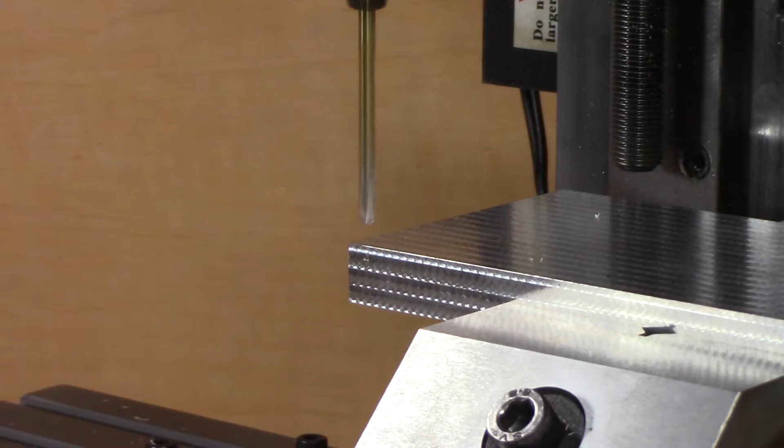This is just fabulous. The first operation is drilling pilot holes for the dowel pins. This allows room for a 1/8 inch cutter to come in with adaptive milling to open up the dowel pin holes so that they're just slightly smaller than needed for the dowel pins. And later I'll come in with a reamer to drill it to the final size.

This is supposed to mill out the holes for the dowel pins, but as you're about to see, I had the machine in the wrong position. I didn't know how far the mill had gone, so that means I didn't know whether I damaged the mold or not. But it doesn't hurt to finish the mold, because it's always possible to repair a mold.

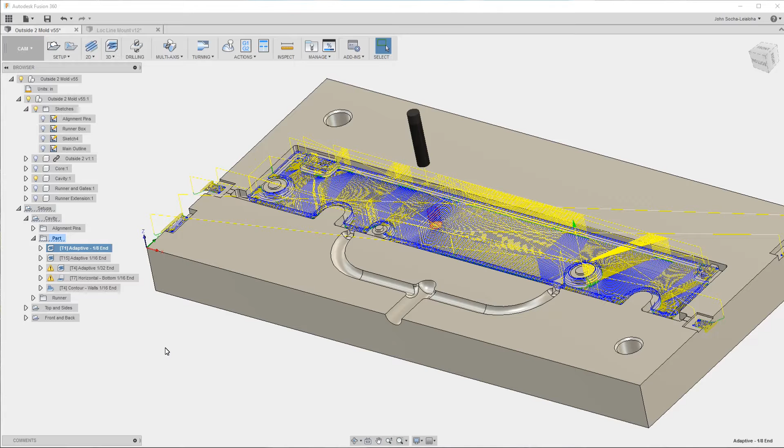In this video, I'm going to focus on cutting out this part of the mold, as well as some of these tabs. I'm doing that with 5 steps. The first 3 steps are all adaptive clearing, and I'm dropping down in terms of tool size. So I start with a 1/8 inch end mill, go down to 1/16, and then 1/32.

And doing that allows me to remove material in additional passes that didn't get removed by the first pass. So for example, here you can see that it's not able to mill into this area with a 1/8 inch end mill, but it is able to get into that area with a 1/16 inch end mill.

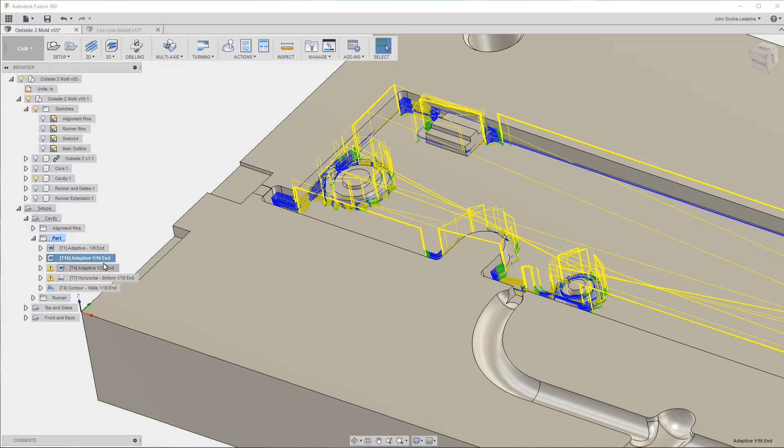The other thing that I'm doing with these three passes is after the first one I'm using rest machining. So it's only machining the areas where there's still material that has to be removed and can be removed by the smaller cutter. The final two steps are I'm clearing up the bottom and then clearing up the walls. Now the walls are interesting.

I can't do that in a single pass because of the draft angle that I have on here. If you'll recall from the first episode where I designed the mold, I have a 5-degree draft on those angles to make it easier to get the parts out of the mold. And that means you can't do 2D milling, you have to do 3D milling to get that angle.

Additionally, I'm using flat end cutters. I don't have any rounded end cutters, just ball nose. But flat is what I need to use for the walls. I have ordered some Lakeshore carbide cutters that have a slight radius on the end, so it's not completely flat. And I think those will do a better job. We'll find out in a future video.

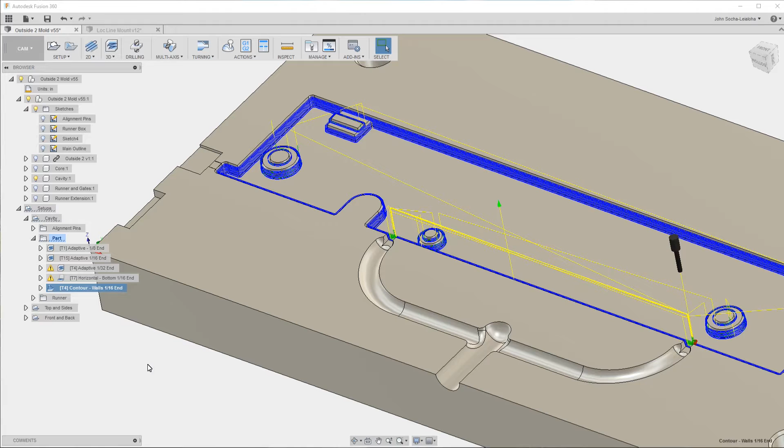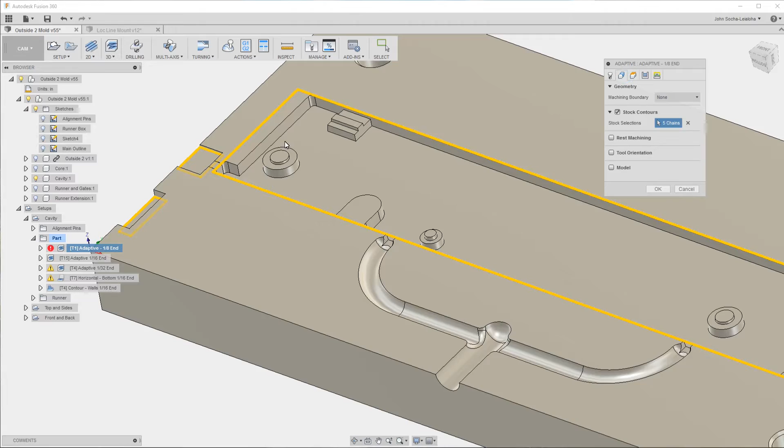Going back to the 1/8 inch, which I'm going to show next, pretty much everything that I set up is the way I've done it in the past. So I set it to the feeds and speeds that I showed in the previous video. And then in terms of what I chose, I used a rectangle around the large cavity and then just clicked on these planes here to select those.

And then the final thing that is relevant is I left 5/1000 both on the sides and the bottom. And that 5/1000 of an inch will be cleaned up by these last two passes here. Let's head to the mill and take a look.

You can see that it's spending a lot of time cutting air. This is pretty easy to fix. You just have to lower the clearance plane. Here it doesn't really matter because there aren't that many entry points, but for the next cutting operation it does matter, and you'll see I'll change that.

My compressor just kicked in and it's actually shaking the floor a little bit because I have it pretty close to the tripod. I'm using the compressor for a little blast of air to clear the chips out of the pocket, and it does a really great job.

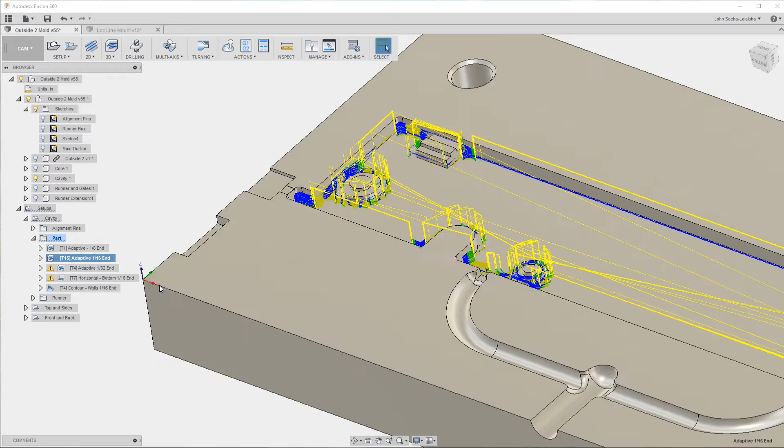Now let's take a look at the 1/16 inch cutting to remove material where we couldn't get it out with the 1/8 inch cutter. The trick here is something that wasn't obvious to me. I had to ask a question on the Autodesk forum, and I got an answer, which was a great answer. So let me explain what I was doing, which is probably what some of you are used to doing. When selecting the geometry, I was used to using stock contours.

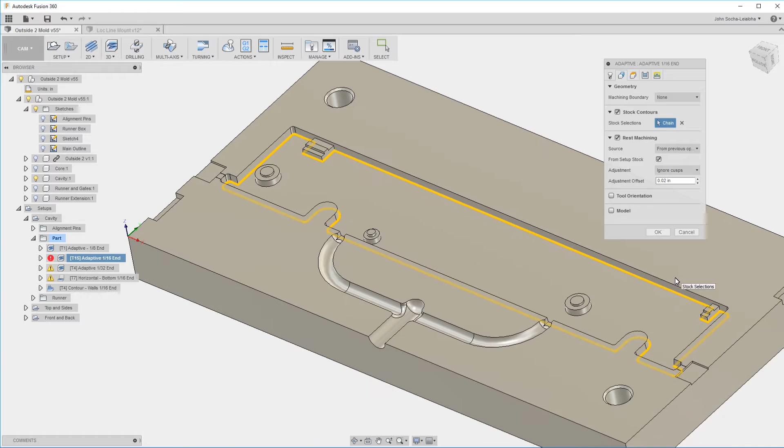So you're probably used to clicking on stock contours and then selecting something like that, which controls the area that will be used for machining. The problem is when you're using rest machining like this, rest machining is creating a 3D model of the material that has been removed so far. So basically the milled operation, the material after the previous milling operation, and then it's using that to calculate the

tool path. That means that when you select rest machining and stock contours, it's going to ignore the stock contours and create a tool path that covers the entire area. That's not what I wanted. So the trick is, instead of using the stock contours, you want to use geometry.

Here what I did is I changed the machining boundary to selection, as you can see there. I selected the same rectangle that I used before, and that told it to keep all of the operations within that rectangle. So now it's able to calculate which parts of the stock can be removed with a smaller cutter only within that rectangle, and that's exactly what I wanted.

If we go back and look at other settings, I left it with a higher RPM, which is what it came up with from the tool library. Most of the other settings I used similar values, so for example feed per tooth. And then for things such as optimal load, I continued to use the same expression, which is to use 10% of the tool diameter. So I pretty much didn't change much, and that gave me this operation here, which is perfect. Let's head to the machine and see how that worked.

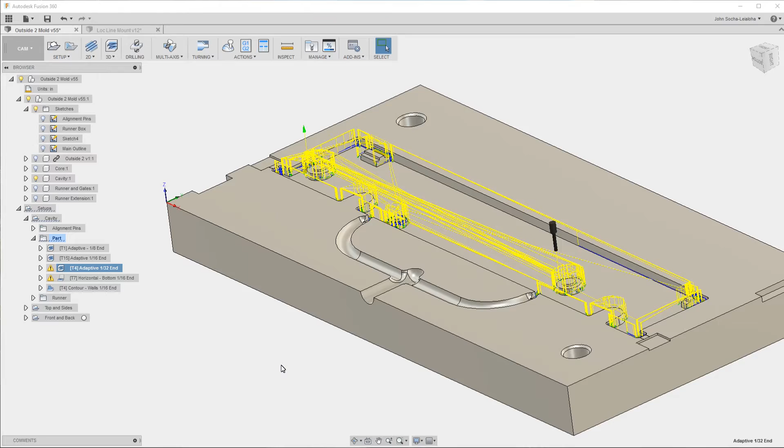Okay, I think you get the idea. Next up is the 1/32 inch cutter to get rid of even more material, because there are still some places that the 1/16 inch cutter could not get to. So I follow the same strategy, which is to use the machining boundary instead of the stock contours. Pretty much everything else the same, and head it off to the machine and you can see what happens next.

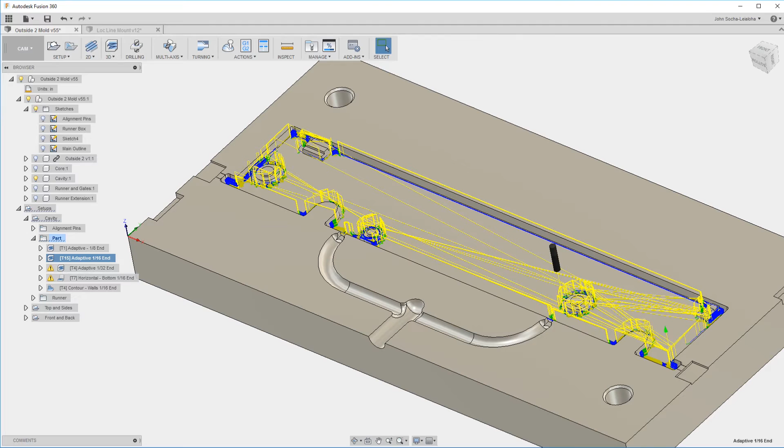So what went wrong? Let's take a look. As I mentioned before, I used pretty much the same settings that I was using with the 1/16 inch cutter, but the 1/32 inch cutter is a lot weaker. And I was too aggressive on the step down. If you take a look here, I had the step down set to tool diameter divided by 2, which means for a 1/32 inch cutter, that comes out to about 16 thousandths of an inch. That was way too aggressive.

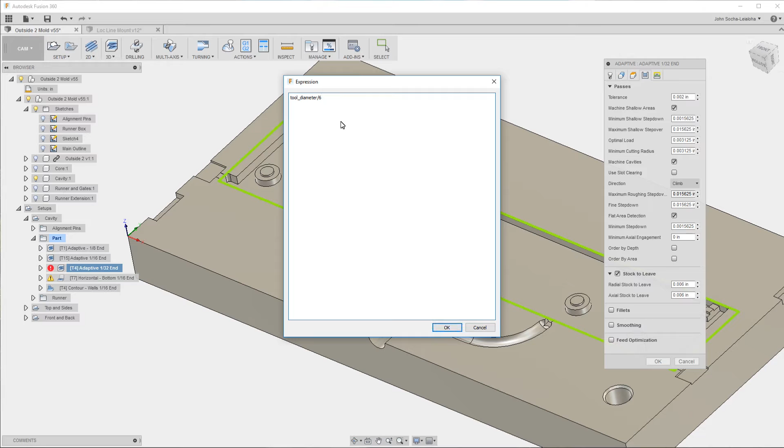So what I did for finishing off this pass with the 1/32 cutter is I changed it to tool diameter divided by 6, which I think is about 5 thousandths of an inch. This takes a while to calculate, but the end result is that it was a lot less aggressive. Unfortunately, it meant that it wasn't using much of the length of the cutter. I had been trying to use more of the length of the cutter, as suggested by John Saunders, for the adaptive milling, but that obviously didn't work in this case. Anyway, changing it to the diameter divided by 6 worked perfectly, and I was able to finish the cut.

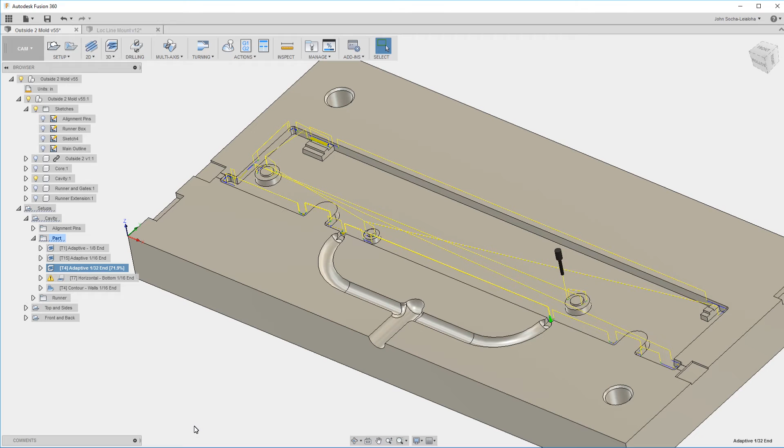Now let's take a look at the finishing of the bottom. Here what I did is I used horizontal roughing, or horizontal finishing. I'm sorry, so it's this one right here, or just horizontal. And there's not too much I changed. I selected the same rectangle I've been using before.

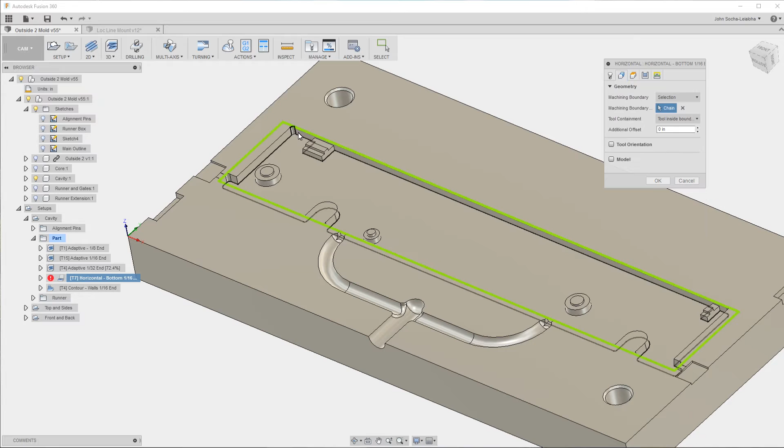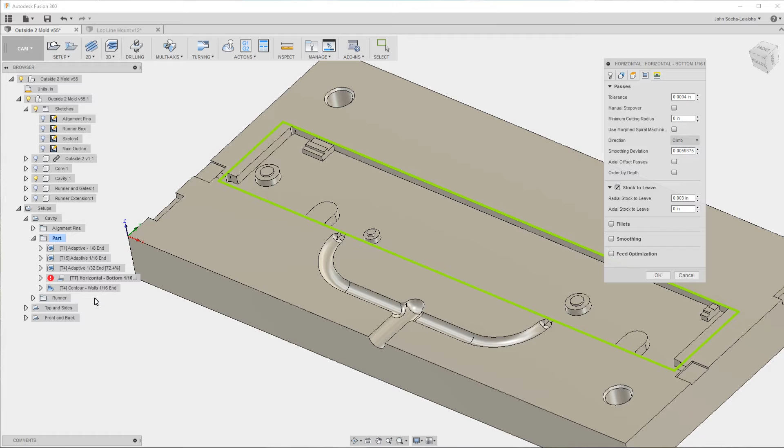And then the important thing is in stock to leave, I set the axial to 0, which means it will mill all the way down to the bottom. And then I set the radial to 3 thousandths because I'm going to let the next operation take off the final material from the walls. And that's pretty much what I set. That gave me this result here. And as you'll see next, it did a great job cutting the flat areas, which include the bottom as well as some of these other areas that you can see here.

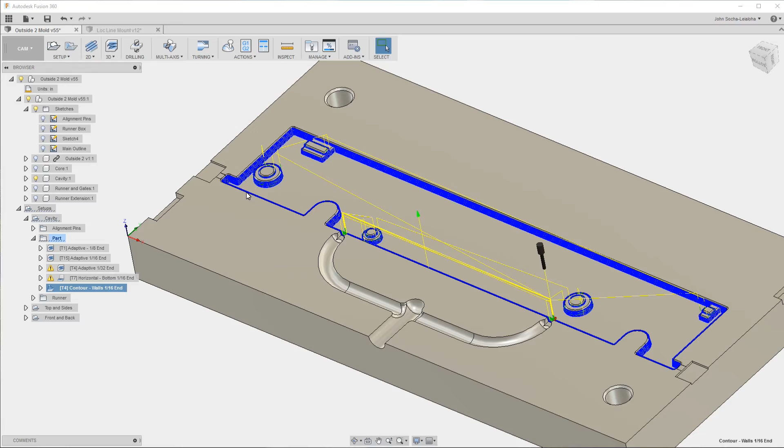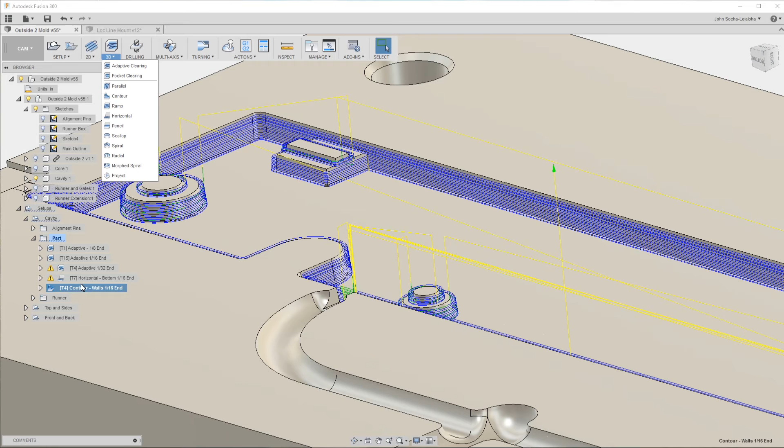The final operation for this episode is cutting the walls that have a 5-degree draft angle. So in order to get a reasonably smooth finish, I have a bunch of lines. You can see the step down is fairly small. This is done using contour, which you can see here, right there. So the contour is following a water line, where the water line goes down a little bit each time. Let's take a look at how I did that.

Pretty much the same, selecting the rectangle. And then the changes in the step down. So if you look at maximum step down, I didn't use an expression in this case. I set it to be 5/1000ths of an inch.

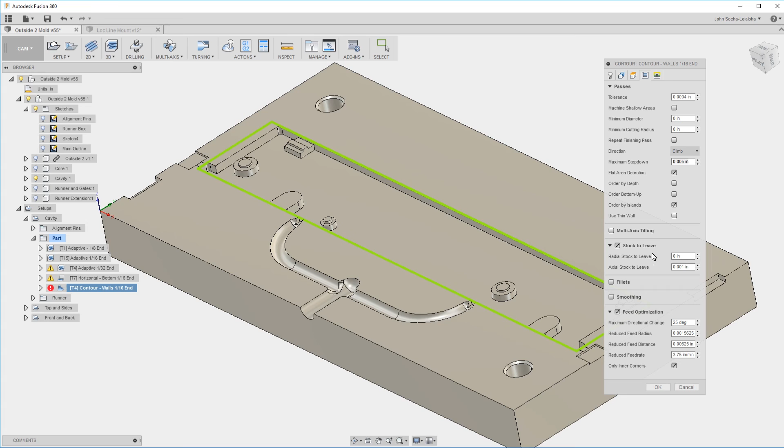And then the final thing that I did is I set the axial stock to leave at 1/1000th, and I did this so that I wouldn't recut anything from the bottom of the cavity that was already taken care of in the previous pass. And then I set the radial to 0 so that we'll remove all the remaining stock from the walls. That's pretty much all there is to it. I'm not going to show video of that operation because it's pretty boring to watch.

And next time, in the next video, we're going to focus on the runner system. And that was certainly interesting in and of itself.